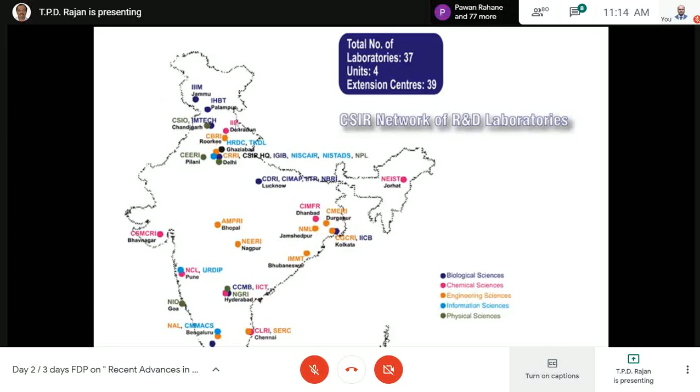Even for energy, we have the Indian Institute of Petroleum at Dehradun. You can visit the CSIR website and get the link, because this may be useful for your students for their research, or you may be able to collaborate with any of the CSIR labs for your research programs as well.

This is CSIR NIIST Trivandrum. Here at NIIST, we work on agro-processing and natural products, biotechnology, chemical science and technology, material science and technology, process engineering, and environmental science.

At Material Science and Technology Division, where I'm working, we work on metallic materials, composite materials, polymers, ceramics, and electronic materials. CSIR is an autonomous society under the Government of India, and the president of CSIR is the Prime Minister, and the vice president is the Minister of Science and Technology. We have a director general, and each lab has a director.

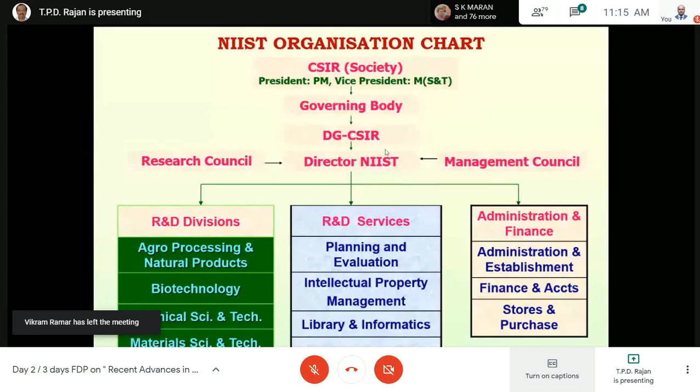With this brief introduction to CSIR, I will move to my talk, starting with just very fundamental basics. Engineering materials are normally classified as metals, ceramics, polymers, and composites. Composites may be metal matrix composites, ceramic matrix composites, or polymer matrix composites, depending on the matrix we are using.

If the dispersoid or the matrix grain size is in the nanoscale, it's called a nanocomposite. If it is the hybridization of two reinforcements, it's called a hybrid composite. And if there is a functionally graded structure, it is called a functionally graded composite material.

Today we will see the lightweight metallic materials and lightweight composites which we are using for different systems. These materials are probably deep rooted in our culture, because whatever we see in and around is made of one or other types of material at the macro scale. Every segment of our everyday lives is influenced by one or other types of materials.

Either conventional materials or advanced materials. In transportation, we develop a lot of technologies, but to visualize and realize them we need different types of materials to convert into useful systems, maybe in transportation, automobile, aerospace, or even aircraft systems.

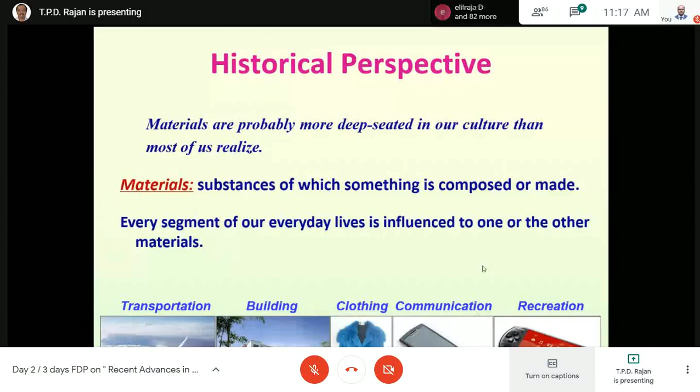The development of the field of materials is very huge, and you can see how even early civilizations are termed in the name of materials: Stone Age, Bronze Age, Iron Age, Steel Age, and we are now in the new advanced material age. Sometimes people call it the silicon age also, because IT is there. So materials form the milestones and physical basis for human civilizations.

So coming specifically to the necessity of lightweighting: we know that if you take different types of materials, for example metal itself, we have steel, which is used for building in reinforcement concrete, or various types of steels which we use in households, for automobiles and so on.

Then we have aluminum and aluminum alloys. Aluminum alloys are used - the main visual thing is in home we use it for utensils and various accessories. In electrical engineering, we use it for conducting material, that is for carrying power. And in the case of automobile, we use it in both engines as well as structural materials. In aircraft, we use it in a large area, so aluminum is used.

And then we use titanium also. Titanium is very widely used in the aerospace sector, and also as an implant in the biomedical sector, apart from steel. Similarly, magnesium is also used for aerospace and other sectors. So we have a range of metallic systems.

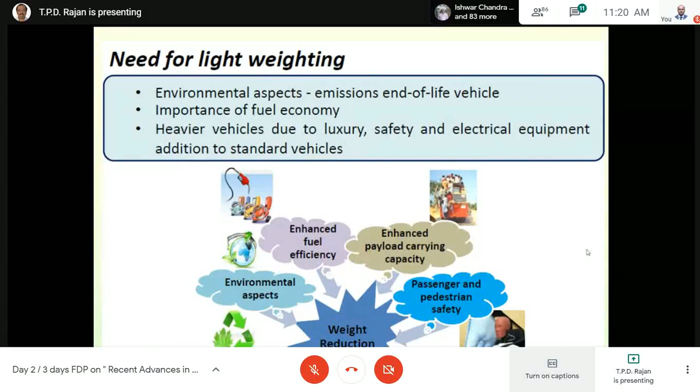So benefits of lightweighting: lesser CO2 emissions because of direct weight saving, due to lightweight materials, and indirect weight saving due to downsizing of components. This leads to lower energy demand and lesser fuel requirement.

Similarly, for the same power to weight ratio, saving weight allows downsizing of the powertrain components. That means weight savings can shorten braking distance for the same braking power.

So you have a lot of weight savings in the case of automobiles, because mainly fuel economy and lower carbon dioxide emission play a major role in the utilization of lightweight materials. Earlier, maybe 20 years back, we had the Ambassador cars, whose fuel efficiency was something around 8 to 10 kilometers. But now we have many vehicles, sedans, which have fuel efficiency more than 20 kilometers. So that means modification in the engine, weight reduction, everything has helped in increasing the fuel efficiency of the automobile.

So the main approaches to energy saving and emission reduction are improvement in automobile technology, improvement in traffic and roads, and good driving habits.

And in the case of new vehicles, energy saving in automobiles comes from hybrid power technology, advanced power systems, and utilization of lightweight materials. We also have structural design optimization, lower friction, and better electronic control systems. Also, alternate energy sources like CNG, LNG, alcohol, and methanol can give better energy savings in conventional systems.

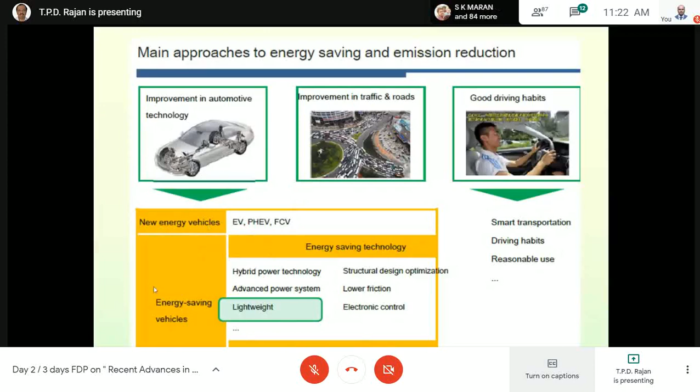So similarly, the new energy vehicles are mostly electric vehicles and hybrid vehicles. Even though they utilize electricity as power, they also require lightweighting. So lightweighting is required both in conventional gasoline-based engines and in electric vehicles.

And if you see the opportunities for lightweighting, as I told, reduced vehicle weight is the most important criteria, and mainly it comes with lightweight materials. So lightweight material means if you use high strength steel, even though the density of steel is higher, the increase in strength can reduce the total thickness of steel. So once we have lesser thickness, then automatically the weight can be reduced.

Or we can replace it with aluminum and magnesium alloys, which have lower density. Aluminum has a density of almost around 2.68 to 2.7, and these aluminum alloys are very widely being replaced in structural parts.

And even in the engine, earlier people were using cast iron and other components, but now all-aluminum engine cars and most components have been replaced by aluminum lightweight engineering. Even in the engines, wherever there's high temperature exposure, they normally give some type of ceramic or high oxidation resistant coatings so that even the light alloys can withstand it.

So apart from the engine, in structural parts, unreinforced and reinforced plastics are being used. And in structural lightweight construction, new structures and complex geometries are being made - laminated and hybrid composite systems, multi-material meaning two materials in a single component, maybe steel and aluminum, or steel and composites, made as laminated structures. And similarly, optimizing the production process, light joining techniques, new manufacturing processes like hydroforming. So all these can be integrated to reduce vehicle weight by utilization of lightweight, metallic, and composite materials.

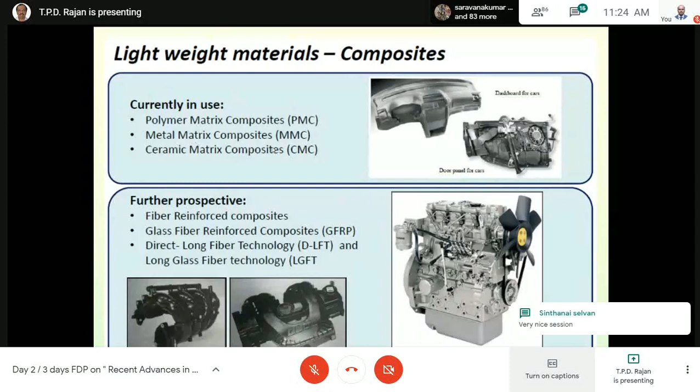So in the case of lightweight materials, specifically composites, polymer matrix composites are very widely used. You see automobile dashboards, door panels, and even glass fiber reinforced plastic air intake manifolds are being used. Engines with sheet molding compounds are used in oil sumps and valve covers and so on. So mostly polymer matrix composites are very widely used in structural or body covers, while metallic and ceramic composites are used to a lesser extent in engine components. But a lot of developments are going on.

And if you see in general, the concept of composite materials is really a boon to engineering materials. By definition, a composite is a heterogeneous mixture of two or more materials with a distinct interface, prepared in an engineering way. The bulk phase of a composite is the matrix, and the other phase is called the reinforcement or filler. Hence the property of the composite is a combination of the properties of both the matrix and the reinforcement, and in most cases it is a synergetic effect.

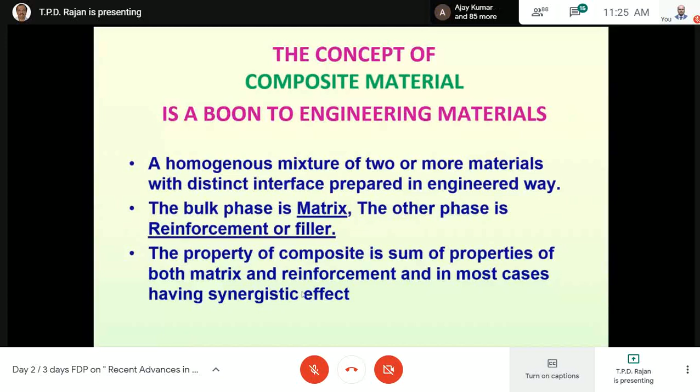In nature, we have wood, which is cellulose fibers dispersed in a lignin matrix. So wood is a well-known natural composite. Similarly, the bone in our body is a natural composite where hydroxyapatite particles are dispersed in a collagen matrix. People have used wood since early civilization, making it one of the most widely used natural composite materials.

Trees can withstand heavy wind blows because, as mentioned earlier, they are cellulose fibers in a lignin matrix, and all these trees have very strong fibers. If you cut the cross section of a tree, you see longitudinally oriented fibers, and these fibers give strength to the tree and any plant so it is not easily broken down even by strong winds.

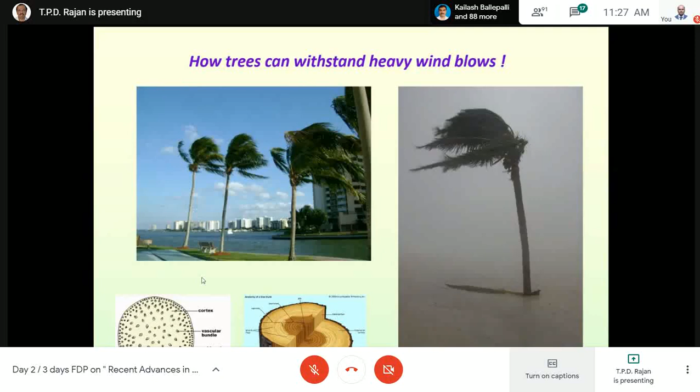In composite materials, polymer, metal, and ceramic matrices are the most widely used systems. Reinforcements used are mostly ceramic fibers, whiskers, and particulates, which possess very high strength, stiffness, and stability. Polymer composites are well developed, while metallic and ceramic composites are being developed for specific uses.

The utilization of hybrid composites, using more than one type of reinforcement, is called second generation composites, and is being developed with a lot of research going on in this direction. Newer systems are mainly focused on functionally graded and smart composite systems.

Coming to the various types of matrices used in composites, plastics like polyesters, epoxies, phenolics, and polyimides are the widely used thermosetting polymers. For thermoplastic polymers, we have nylon, polyethylene, polystyrene, polypropylene, PMMA, and so on. So we have a wide range of polymeric matrices for making composites; however, epoxies, polyesters, and phenolics are the most commonly used matrices for polymer composites.

In metals, we have steel, iron, aluminum, zinc, copper, nickel, silver, titanium, magnesium, and various superalloys. However, aluminum, nickel, titanium, and magnesium are widely used as matrix materials, while as individual metals, steel and iron are used to a larger extent for building and other construction purposes.

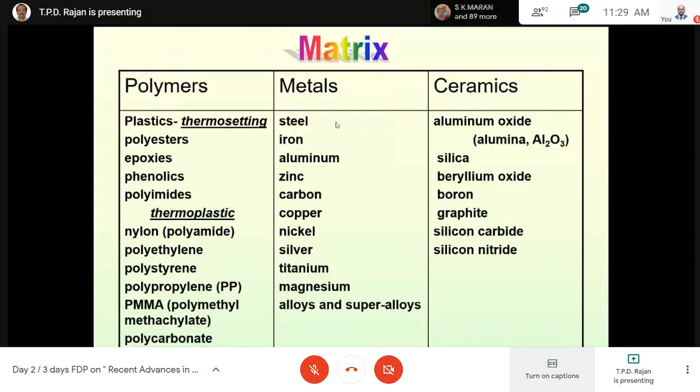In ceramics, we have aluminum oxide, silica, beryllium oxide, boron, graphite, silicon carbide, and silicon nitride—oxides, carbides, and nitrides of various metals which form ceramics. So we can see that there are vast and different types of matrices available to choose for required applications.

So mostly it is a polyester or epoxy reinforced glass fiber reinforced composite, and sometimes they use hybridization of carbon and glass fiber also. The main advantage is that this unidirectionally fiber reinforced composite has very high strength and low density. That's why they use it in wind turbine plants. This is one of the typical examples of utilization of lightweight composite structures in the wind energy sector.

We see the development of various types of composites. The development of composites has been happening for many years. Since 200 BC, reinforced clay-like deposits of the Nile Valley with grass plant fibers have been used in temple walls and tombs in Egypt by the Egyptians. Even the Han dynasty in China used straw-reinforced bricks in the watchtowers of the Western Great Wall of China.

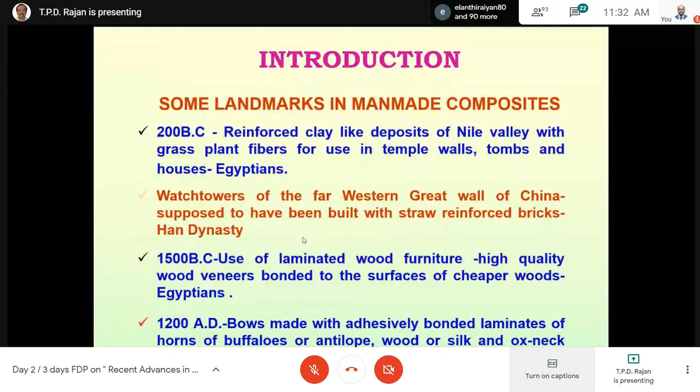Recently, in the early 20th century, people started utilization of phenolic resin asbestos—asbestos being a mineral fiber dispersed in a phenolic matrix resin—used for various applications. In 1942, the first fiberglass boat was made, and fiber reinforced plastics were used in aircraft and electrical components.

In 1946 to 1950, the invention of the filament winding process led to the utilization of filament-wound structures for missile applications. In the late 1950s-60s, the development and introduction of boron fibers and high strength carbon fibers took place.

So for the development of successful composites, we require a very good matrix and very high strength, high performing reinforcement also. The development of these continuous fibers is also very critical.

Once fiber development had come, they started utilizing these fibers in advanced composites in aircraft in the 1960s. In the 1970s, Kevlar fiber was developed and introduction of MMCs took place. In the 1980s, significant increase in utilization of high strength and high modulus fibers was made.

From the 1990s onwards, newer MMCs, CMCs, bio and nano composites were introduced, and the discovery of CNTs led to the utilization of CNT-dispersed composites for both supercapacitors and other applications. Now a lot of nanocomposites are being developed and used for a wide variety of applications.

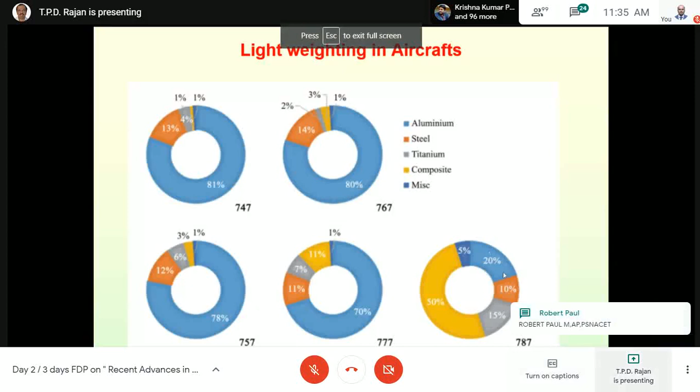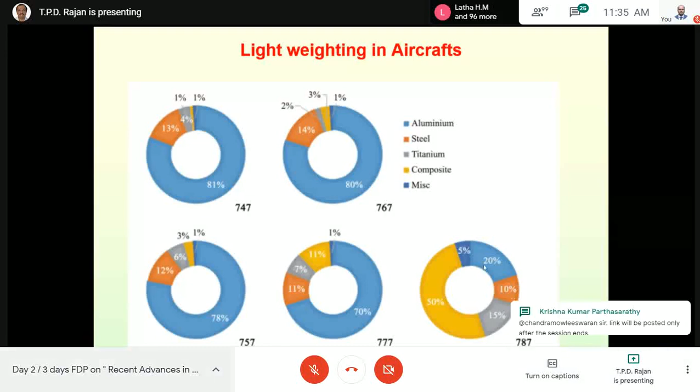Composite here means different types of laminated polymer and all types of composites. But parallelly, the utilization of aluminum alloys dropped from 81% to 80, 78, 70, and down to 20%. So one material is replaced by another. But still, in some high temperature regions and other places, you cannot completely replace with composites, so they still use aluminum, steel, titanium, and various other materials in the aircraft.

They use purely aluminum in those regions. I think when you travel next time by aircraft, you can just closely watch the regions where these composite materials are used.

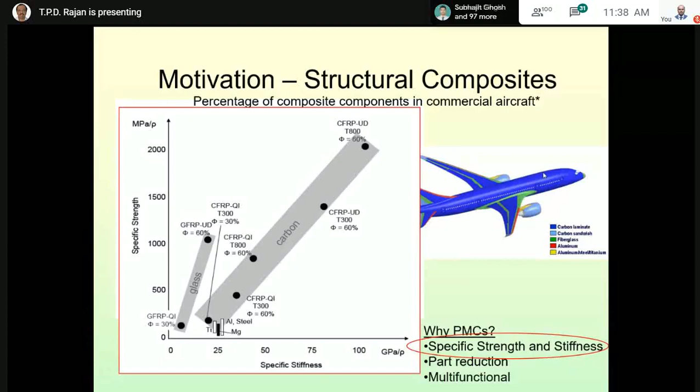So the fiber orientation is very critical in the case of continuous fiber reinforced plastics to attain the properties. Normally when designing parts or components, they orient the fibers towards wherever the maximum load requirement is there. Then accordingly they design and make the composite systems.

Similarly, apart from aircrafts, in launch vehicles and satellites also they use a lot of lightweighting to increase the payload. For example, take the PSLV, a very widely used launch vehicle by India. Here the strap-on motors mostly use outer shell as steel, because maraging steel is very widely used in that area because of the high temperature requirement of the solid motor case.

But wherever the liquid engine is there, either in the second stage or fourth stage, they mostly use 7000 series aluminum alloys - that means 7075, 2219 or 2014 type of lightweight aluminum alloys. Many other parts use high strength, even titanium alloys, where temperature requirements demand it. This has been extended to GSLV, GSLV Mark II and 3 systems also. Even the heat protection system uses high temperature resistant silica tiles in a re-entry vehicle.

So lightweighting is required in automotive sectors, aeronautical aircrafts, or launch vehicles - in all these places, weight reduction is most crucial. So here we can see how composite formation enhances the system.

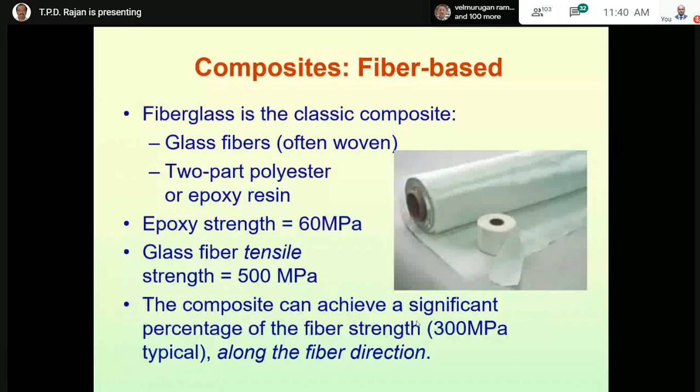For example, if you take a fiberglass reinforced polyester or epoxy composite, the strength of epoxy when used as such is 60 MPa, and the tensile strength of glass fiber is 500 MPa. Once we reinforce this glass fiber into the epoxy matrix, the overall strength of the glass fiber reinforced epoxy composite is almost 300 MPa. That means we can increase strength because as such we cannot use the fiber alone for structural application - so we incorporate this fiber into a matrix for high strength modification.

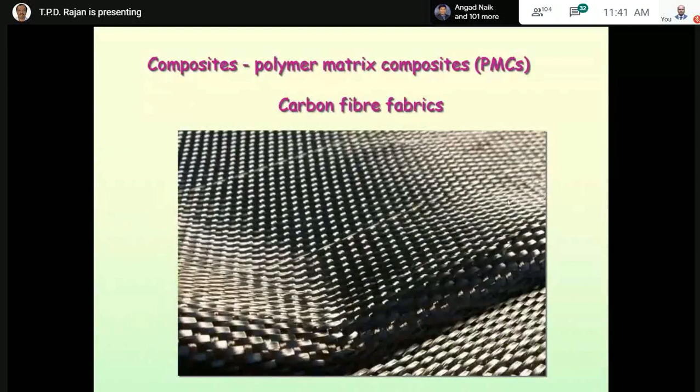Similarly, laminated composites are also used to get high strength in several directions of the fiber, because unidirectional means you get strength in one direction, but in laminated sheets woven in different directions, we can attain strength at different properties. Glass fibers are chosen mainly because of tensile strength, stiffness, and electrical insulation properties. These are the commonly used carbon fiber matrix reinforcements used for making polymer matrix composites.

Similarly, ceramic composites are very widely used in aerospace systems because of the requirement of high temperature resistance, especially in rocket engines or thermal protection systems in re-entry vehicles, nose cone leading edge, scramjet engines for future space vehicles, and so on.

The systems used are carbon-carbon composites with TBC or EBC coatings, thermal barrier coatings, or SiC composites, which is more attractive, or some of the ceramic-based composite, which is developed and used for composite application.

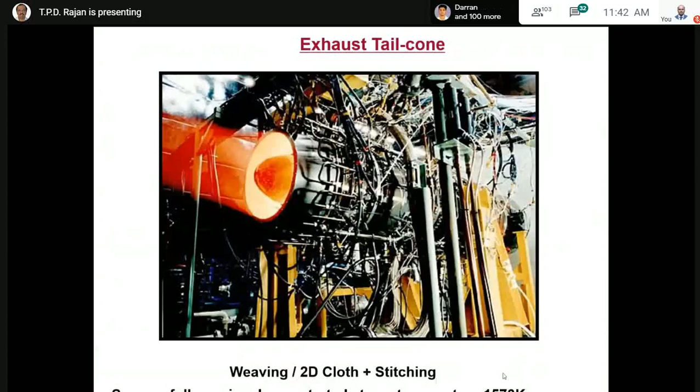The exhaust tail cone in aircraft engines uses 2D woven cloth fiber reinforced composites which can withstand temperatures of 1573 K. SiC thrust chambers are made by 3-axial braiding of silicon carbide fibers, infiltrated with silicon carbide matrix, then hot pressed and fired, used in high temperature test applications.

Ceramic composites are very costly, and mostly used where high temperature resistance is required. But polymer and metallic systems differ: metallic systems are widely used in medium temperature ranges, while polymers are used mostly at room temperature ranges.

The temperature stability of these composites is very critical for their utilization. As we increase the temperature, the strength and stability of the composite come down. For example, polymers can be used up to maybe 200 to 300 depending on the polymer, while aluminum can be used up to around 500 in very few cases, mostly up to 400. Aluminum fiber reinforced composites are used up to maybe 600, though 600 is very difficult, mostly 500 to 550, but the strength of fiber reinforced composites is higher. So pure polymer strength is very low, while aluminum strength is in a higher range.

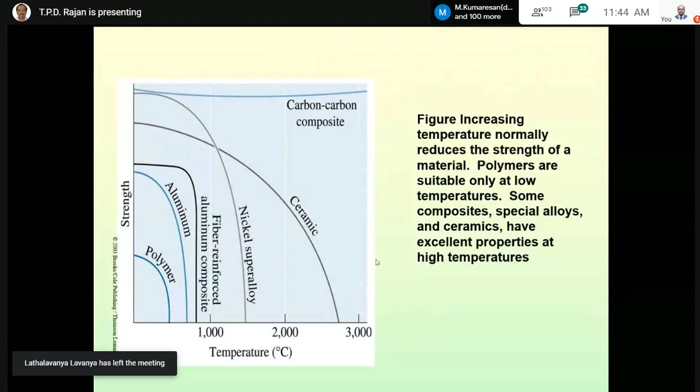Depending on the usage of materials and their temperature requirements, you can choose materials: polymer, aluminum fiber reinforced composites, then nickel superalloys, ceramics, and carbon composites which can withstand up to 2500 degrees and so on. Even ceramic composites are used for cemented carbides, which are used in cutting tools.

When we select materials for different applications, the criteria of selection is very important. Everybody knows about the tragic end of one of the first luxury ships, the Titanic. Steel normally used at room temperature has very high strength, but the same steel, when reduced to very low temperature in the freezing range, becomes ductile to brittle. In the physical metallurgy of steel, this is called the ductile to brittle transition - a ductile material immediately becomes brittle when taken to very low temperature.

If you don't choose the material properly, failures occur. That's why when the steel used for construction of the ship hit against an ice rock, it completely broke because it was in a brittle nature and could not withstand the impact. Similarly, in aircraft also, the material is very critical.

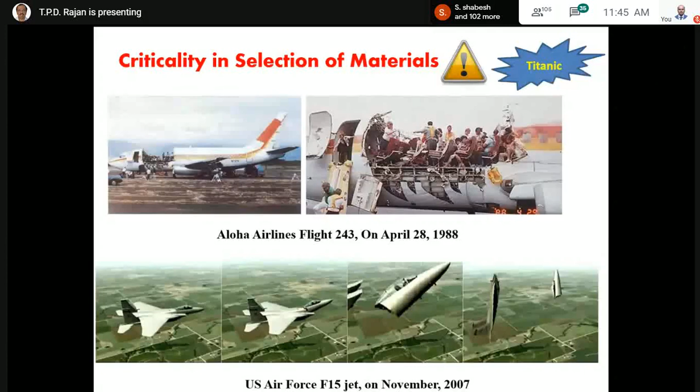Now I will move to metallic composite systems, which is also most widely developed for lightweighting. I had given a lot of general ideas about lightweighting in automobiles, spacecraft, and launch vehicles, and now I will move into the area we are working on, metallic composites, and how these composites are being used for lightweighting systems.

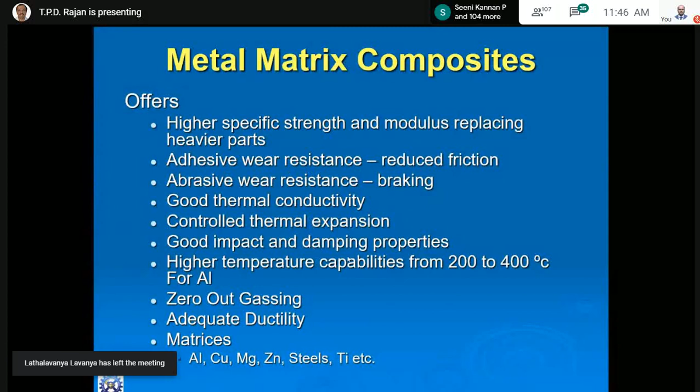I will only highlight the important systems and points. Metal matrix composites possess high specific strength and modulus, replacing heavier parts, and also possess adhesive and abrasive wear resistance because of reduced friction and braking. They possess good thermal conductivity, controlled thermal expansion, and good impact resistance. Most widely used matrix materials are aluminum, copper, magnesium, and zinc.

Initially, people started developing continuous fiber reinforced composites, mostly boron reinforced aluminum, carbon reinforced aluminum, and SiC reinforced aluminum, mostly for defense sectors. SiC fiber reinforced titanium is also developed. Unidirectional, bi-directional, and multi-directional layouts of aerospace structures have been developed and utilized.

However, the problem with these continuous fiber composites is the high cost of the fibers and manufacturing. This composite provides anisotropic properties, meaning the fiber-oriented direction gives very high strength, and the methods used to manufacture this are also limited. So the applications of continuous fiber reinforced composites are very limited to defense and aerospace sectors, because in these sectors, the performance of the material is more important than cost effectiveness. Mostly people look for performance because these are costly systems.

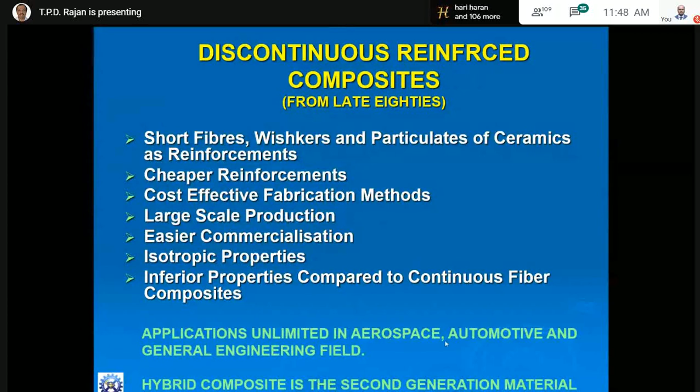Later in the 80s, the development of newer short fibers, whiskers, particulate reinforcement which are cheaper, and development of cost-effective methods at large scale has led to easier commercialization. These materials provide isotropic properties. However, the properties are inferior to continuous fiber composites, but the isotropic properties are enough for making automobiles and other sectors. So discontinuous fiber composites have applications in aerospace, automotive, and general engineering fields.

In the case of metallic composites, sometimes people use only one type of reinforcement, which is called monocomposite. If they use more than one type of reinforcement, for example an SiC particle and a carbon fiber oriented toward the matrix, where you can only see the diameter, these types of composites are called hybrid composites, meaning we have more than one type of reinforcement.

Normally the processing techniques used to make these metallic composites are semi-solid processing, liquid metal casting, spray casting, infiltration, and in-situ processing techniques. In the case of solid state processing, we can use powder metallurgy, diffusion bonding, pultrusion, and mechanical milling techniques.

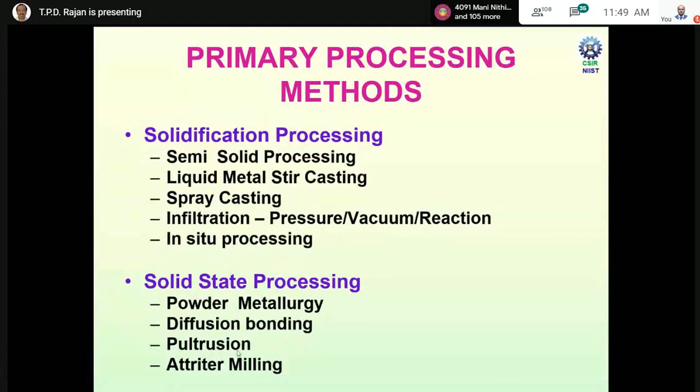In liquid metal processing, we take a melting furnace and melt the alloy inside it, then introduce a mechanical stirrer. Once we stir, a vortex is formed, and we add the particles into the vortex so they get mixed in. This mixture can be made directly into components, or converted to billets which can later be rolled, extruded, or forged, or remelted and converted into components, or directly made into components by special casting such as squeeze or pressure die casting techniques. This is the liquid metal processing technique.

It has easy adaptability and direct component casting is possible. However, the limitations are controlled dispersion of the reinforcement, casting defects, interfacial reactions, and the need for reinforcement surface treatments.

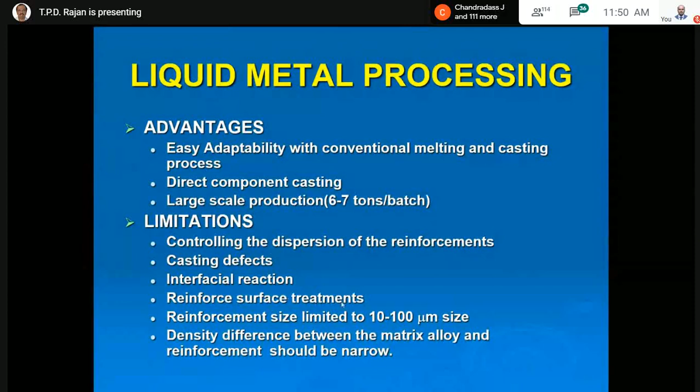This is a typical aluminum SiC composite gear housing made by liquid metal casting and sand casting. After sand casting, it looks like this, and when we machine it, it is converted into very nice gear housings and piston rings. This is used mainly in amphibious battle tanks, because battle tanks also require lightweighting.

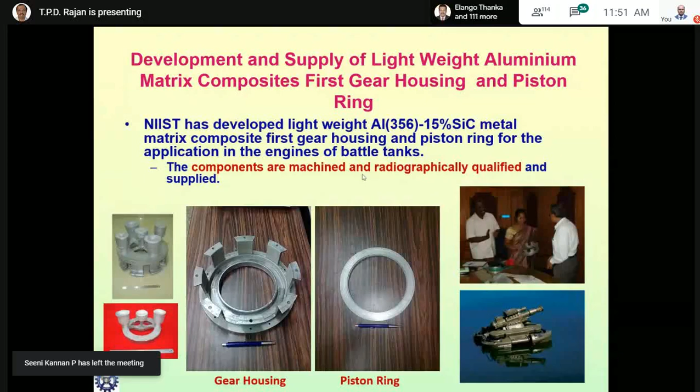You know that when there is a war, there are both heavy tanks and light combat tanks. Light combat tanks have to move faster during an air attack, and move faster across different terrains - maybe water, hills, and all types of terrain. So they use lightweight, high-speed tanks, which require a lot of lightweight materials.

Similarly, lightweight materials are used in bulletproof materials, because shielding also has a problem - if you use steel or other heavy materials, it can withstand the attack, but the overall strength and weight of the vehicle will increase. So they normally use particle reinforced composites that can withstand bullet attacks.

Similarly, composites are used in nuclear applications also. Here it is mainly a functional application, meaning it is coupled with lightweighting as well as neutron absorption. Normally, in a nuclear reactor, fuels are taken from the fuel processing plant to the nuclear reactors, as well as from the reactors back to the yard where they are dumped or stored. These fuels will have some neutron radiation.

When radioactive material is taken through public transport systems, this might affect the traffic as well as the people in and around. So normally it's protected with lead and various types of boron carbide and other materials. Normally they use this boron carbide reinforced aluminum composite as a shield for these containers, because boron carbide is a well-known neutron shielding material.

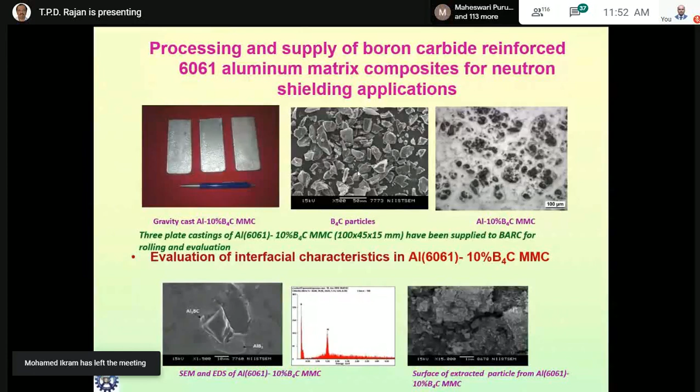The next technique is semi-solid processing. In the case of liquid processing, we completely melt the metal above the liquidus temperature, meaning it's 100% liquid. But in semi-solid processing, one particular phase will be in the solid state, and the other part is completely melted.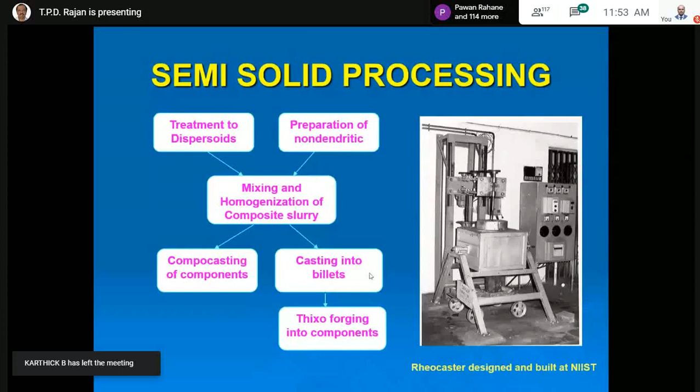This is called semi-solid processing. Here also we can add the particle in the semi-solid condition and disperse it. The advantage is that high integrity near-net shape components with more uniform dispersion and minimum interfacial reaction can be made into composites, and large scale production is also possible. The advantage is dispersion of reinforcement in the nanoscale.

The third technique for processing aluminum composites is the infiltration technique. Here, instead of adding the particle in the melt, we take a porous preform of the fiber or the particulate. Then we pour the metal, placed inside a die in a hydraulic press, and once it's in the liquid state we apply pressure on the ram, and it gets squeezed, and this metal infiltrates into the porous media. So it's called squeeze infiltration.

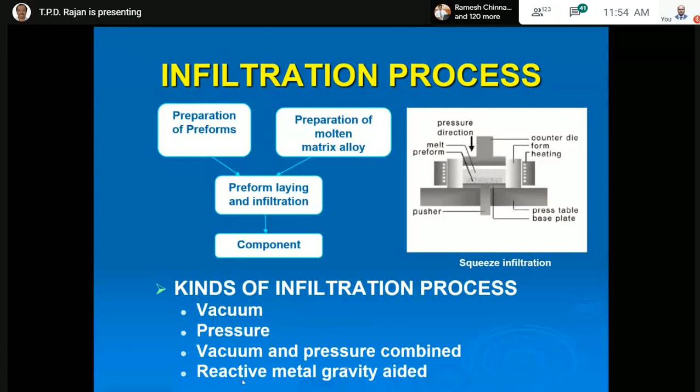Other types of infiltration processes also exist, such as vacuum and pressure coupled, and reactive metal gravity aid. This is a porous structure of an SiC particulate system.

To make this porous system, we mix silicon carbide with some binders and some porogens. Here the inorganic salt is used as a porogen, and then we have to sinter it. Once sintered, we can remove the inorganic porogen salt either by leaching, sublimation techniques, or melting it out. Then you end up with the porosity like this.

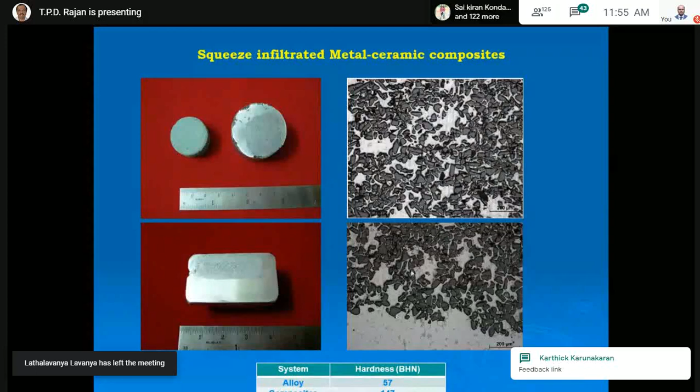This is a hollow body, and we can infiltrate it with the metal. You can see that this is a metal, this is a porous body, and into these pores the metal is getting infiltrated. You can see this is an aluminum matrix SiC composite made with the infiltration technique. The advantage is that the alloy has 57 BHN, while the composite has 147 BHN.

So the metal infiltrated composite brake pads are used because of their friction properties. You can have integrated brake pads in a single system. Normally the brake pad has a front friction layer and a back plate.

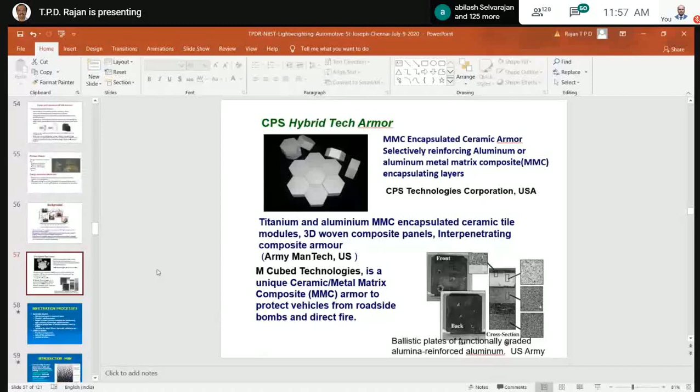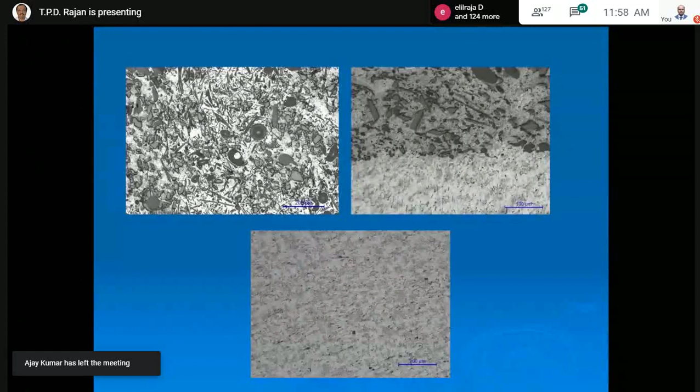So this is an integrated brake pad, meaning you have the brake back plate and the friction layer fixed or integrated into a single system. This friction layer has fibers as well as hard particles, ceramic particles, graphite which controls friction, and other fillers like silica and so on. The back plate gives the support, and the front friction layer takes care of braking when it is done.

In conventional systems, normally what happens is delamination at the interface, a common failure being delamination between the friction layer and the back plate. Another area is functionally graded armor plates, which can be made using this integration, because armors are very much required in protection. Normally they use integrated armors where one side has a metallic system and the other side has a hard reinforcement, which is called an integrated armor, giving more efficiency in protecting against projectiles or bullets by the composites.

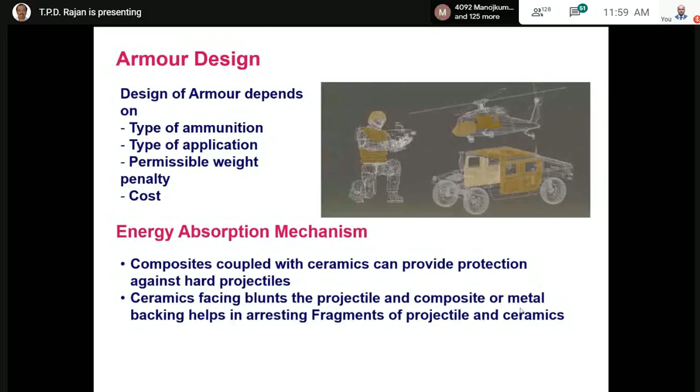These armors are designed for various body armors, vehicle armors, and other types of armors. The energy absorption mechanism is that composites coupled with ceramics provide protection against hard projectiles. That means ceramics facing blunts the projectile, and the composite or metal backing helps in arresting the fragments and projectiles. So this is called an integral armor.

More than that, it's lightweighting. It is used for varieties of systems. So these are some of the MMC armors which are used.

That is ceramic armors, selectively reinforced aluminum armors, which is developed by CPS technologies. Similarly, titanium and aluminum MMC armors with 3D woven composite panels. M Cubed also uses MMC armors to protect vehicles from roadside bombs and direct fire. This is again a functionally graded aluminum composite which is used for armor applications.

So I will give a brief introduction to FGM. I had given an extensive lecture on functionally graded materials last time, because this is one of the advanced materials. So I will conclude the talk with some of the FGMs, which I will go through very fast. Functionally graded materials are smart materials which have a location-specific gradual change in properties, formed or induced through changes in the micro or macro structures.

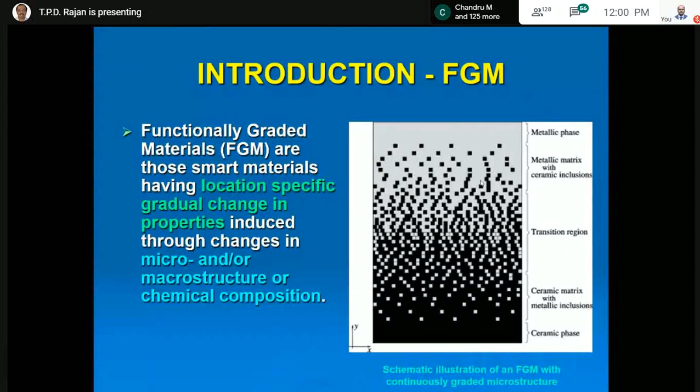Here we can see one side you have 100% ceramics, and the other side you have a metallic phase. These are also mainly used for lightweight structures, because in the conventional approach we develop the component by the list of existing materials, but in the FGM approach we take an inverse design procedure. That means you will be selecting the materials from a choice of various types of materials.

Then we will do the reverse analysis - reverse engineering, inverse design procedure - and then we will be fabricating the component by using the mixture of different materials and different processing techniques.

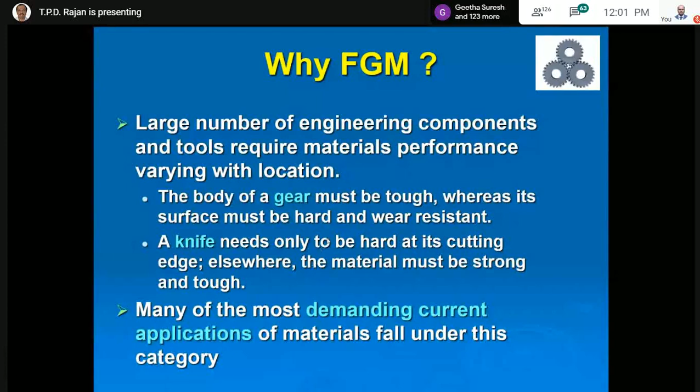So a large number of engineering components and tools require performance that varies with location. Just like the body of a gear must be tough where its surface must be hard and wear resistant. Similarly, take a simple knife - the edge has to be hard, whereas elsewhere it must be strong and tough. Many of the components used in engineering applications fall under this category.

If you see, these functionally graded concepts exist in engineering materials and different types of natural materials, just like bone and even wood. In the case of bone, the outer shell is very hard, which takes the load of your body, and the inside is porous, which acts as a functional region where it generates a lot of body fluids.

Similarly, if you take wood also, this is a bamboo cross section. The outside has high strength fibers which take the load, and the interior is soft tissue which acts as a region for growth as well as for transportation of minerals, water, and other materials from the root to the top of the leaf. So this is a case of functionally graded concepts in nature.

But Japanese scientists in the mid-80s were looking for advanced thermal barrier systems for re-entry space vehicles. So what they thought was - when the spacecraft is entering from the outer orbit to the Earth's atmosphere, it normally comes with a speed of Mach 18.

That means almost 28,000 kilometers per hour. You can visualize how much that is - normally our car speed may be something around 60 to 100, 120 kilometers. But you can see the speed at which it is coming into Earth's orbit, and when it comes inside the atmosphere especially, there is a collision with air molecules which leads to an increase in temperature. Once the temperature increases, it may go up to 1300 to 1600 degrees C.

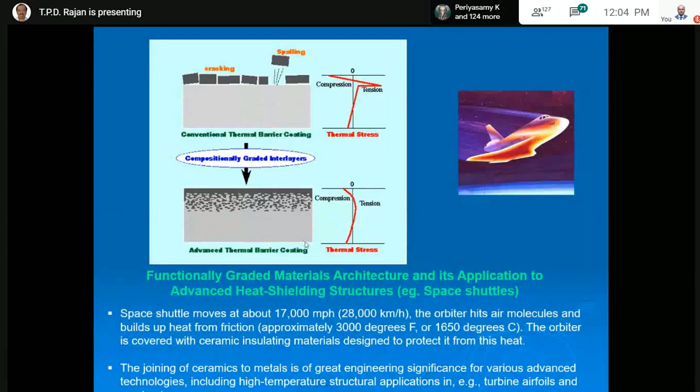In a conventional thermal barrier system or thermal barrier coating, there is thermal stress at the surface, with a cladding between a substrate and the ceramic tile. Because of this thermal stress, cracking and spallation takes place. But with an integrated advanced thermal barrier coating using a compositionally graded structure, the thermal stress is smoothed so that it cannot delaminate. That's why people have started using functionally graded structures for advanced heat shielding materials.

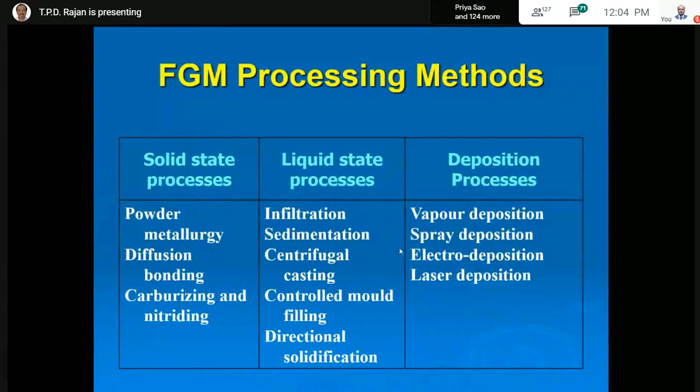The same processes used for MMCs apply here - powder metallurgy, diffusion, carburizing, infiltration. All these processes can be used for the composite infiltration technique I had already discussed.

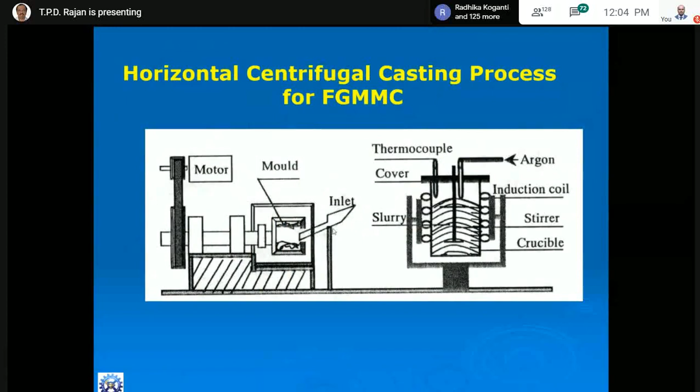Another technique is centrifugal casting, where a mixture of composite is poured into a rotating mold, leading to the formation of two different layers - particle enriched and particle depleted layers. This is a furnace and centrifugal casting machine with a rotating spinning mold. Once the spinning mold is on the horizontal axis, it's called horizontal centrifugal casting, and if the axis of rotation is vertical, it's called a vertical centrifugal casting machine.

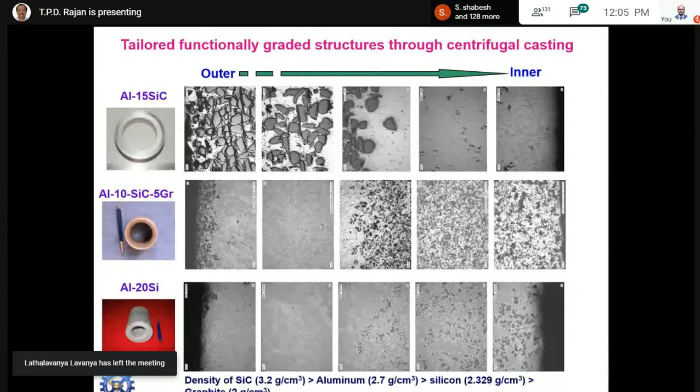Once you centrifugally cast it, because of the variation in density, if the reinforcement density is lower, it goes towards the interior periphery, and if the density is higher, it goes to the outer periphery. So in aluminum graphite composite, graphite has lower density, so it goes to the interior periphery, and silicon carbide, which has higher density, goes to the outer periphery. This gives you a functionally graded composite. In the aluminum SiC system, the SiC particles segregate towards the outer periphery because of the higher density of SiC, 3.2 grams per cc, compared to aluminum's 2.7. However, graphite at 2 grams per cc and silicon (not silicon carbide) at 2.3 gets segregated towards the interior periphery.

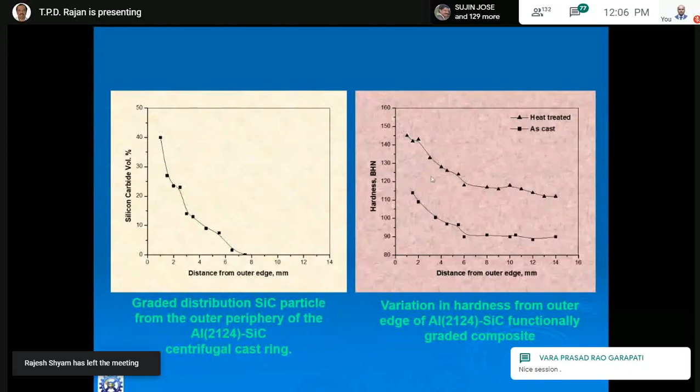These are some observations I made, showing the structure where particles are present towards the outer region. This increases the volume fraction of particles towards the outer region to around 40%, and this increases hardness - the outer periphery has a hardness close to 145, whereas the interior is around 115 BHN, in the case of an aluminum 2124 SiC system.

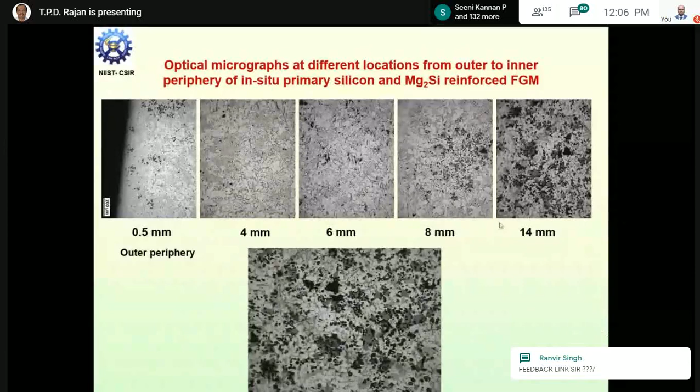This is also a centrifugally cast primary silicon and Mg2Si system - a typical brake rotor disc, centrifugally cast, which has particle concentration in the braking region. The volume fraction is very high in the braking region, and this enhances hardness, tensile strength, modulus of elasticity, and compressive strength - meaning the properties in the braking region are very high.

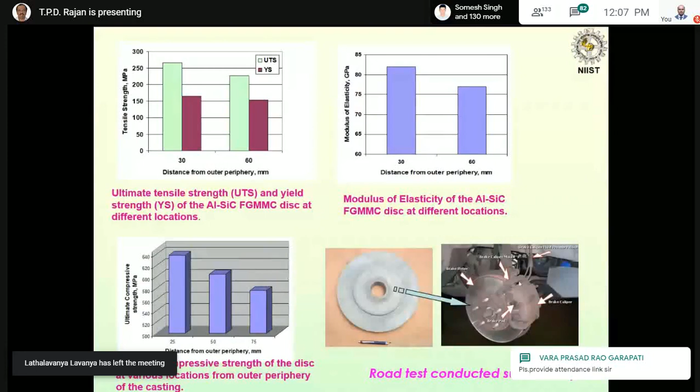Once you apply the brake and the brake pad comes in contact with the rotating disc, this exerts a high compressive force and friction force on it. The presence of silicon carbide increases the stiffness as well as wear resistance. So braking performance is there, but the main requirement is light weighting - you can use an aluminum composite. The disc used is 1/3 the weight of a cast iron disc.

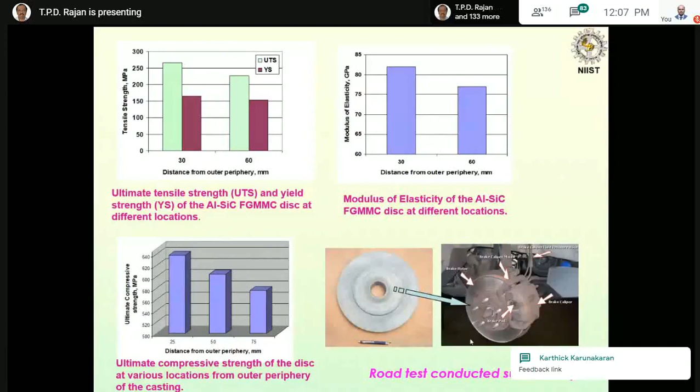Similarly, commercial alloys can also be used to make functionally graded composites, like 390 alloys. This is a centrifugally cast alloy which shows higher primary silicon towards the interior region. This can be used to make cylinder liners in automotive parts, apart from the brake rotor disc.

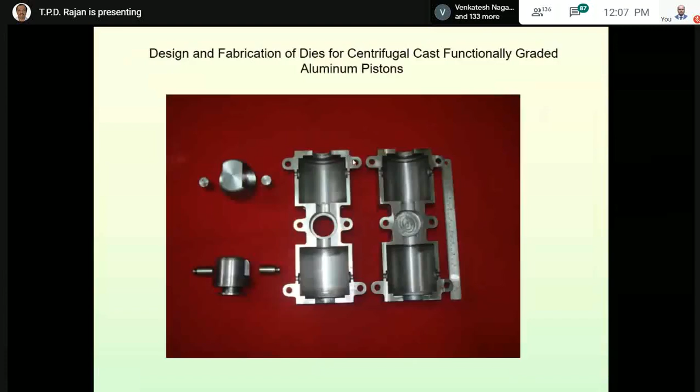Similarly, pistons can also be made by functionally graded aluminum systems using a mold, and in pistons made by the centrifugal casting technique, you can see that certain areas have very high hardness. Apart from centrifugal casting, we can use sequential casting also.

That means we have two layers, one above the other. We can pour it and make this sequential - one area can have a very hard alloy, and another area can have a soft alloy.

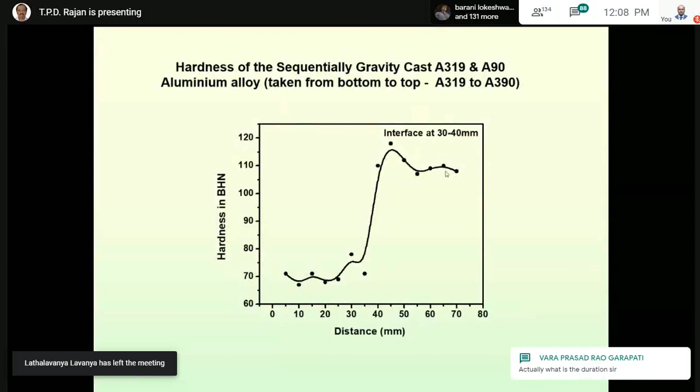You can see the hardness of soft alloy is around 70 BHN, and the hardness of 390 hard alloy is 110. That is in the case of as-cast condition.

Similarly, the gradient slurry disintegration technique is also used to make the composite. Here, what they do is disperse the composite and allow it to settle. Then the bottom pour furnace is used, and the initial casting will be rich in particles, while the second one will have a very low particle region.

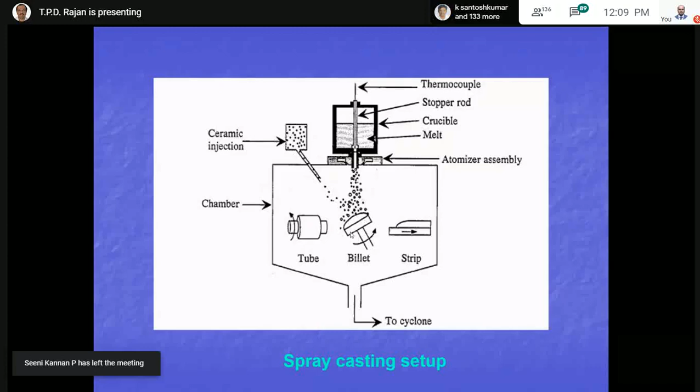Similarly, the spray deposition technique can also be used to make the composite. In spray deposition, we have a crucible into which we have the melt, then an atomizer. The melt is atomized, and there is a ceramic injection. The ceramic particles are injected along with the atomized melt and get deposited on the substrate, leading to the formation of a functionally graded composite structure.

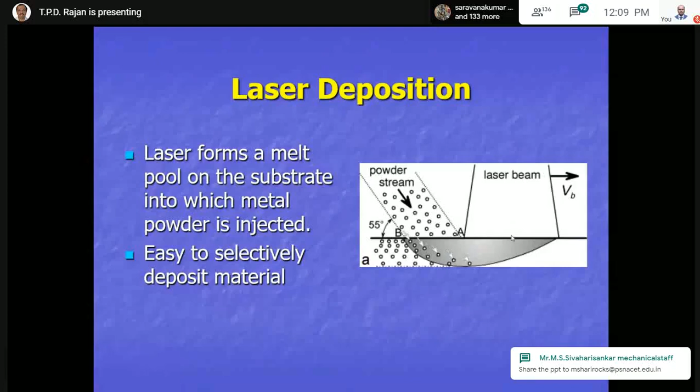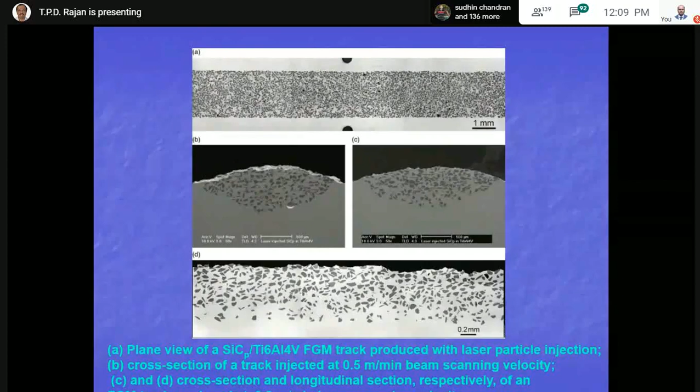Another technique is laser deposition. Here you have a substrate over which a laser beam moves, melting the surface, and powder is injected which penetrates inside and gets dispersed by the laser deposition. This leads to the formation of particles. This is a top surface, and this is a cut cross section - we can see this is a graded formation of silicon carbide particles in a titanium 6 aluminum 4 vanadium composite system.

Similarly, laser cladding can also be used. That means you coat substrate A with B, then pass the laser, and it gets melted and mixed. The B layer can again be melted, so a layer richer in B will increase, and finally you end up with a layer complete with B. So this is also possible.

So these are some of the lightweight materials, lightweight metallic composites, and lightweight functional materials. I will end with the engineering applications of metallic composites in both automotive and aerospace systems. MMC is very widely used in ground transport, electronics and thermal management, as well as in aerospace sectors.

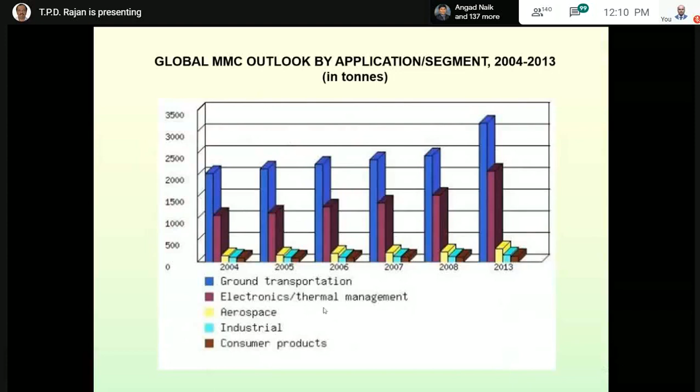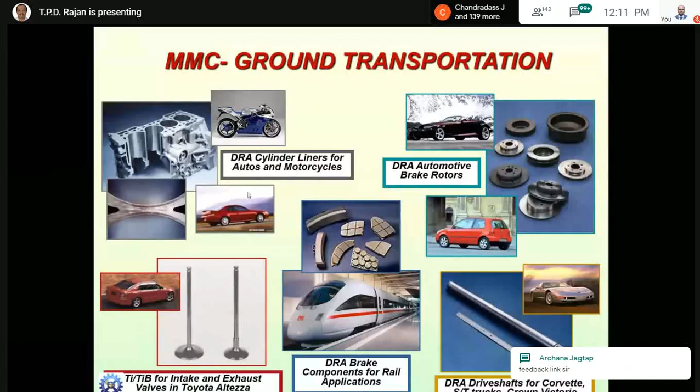In the case of ground transportation, cylinder liners are used in automobiles. Automotive brake rotor discs are being developed, and brake pads are also developed and used in high-speed trains. Then titanium boride intake and exhaust valves are used in Toyota vehicles. Similarly, drive shafts have been developed with aluminum composites, mostly with aluminum or titanium composites, with lightweighting as a major criteria.

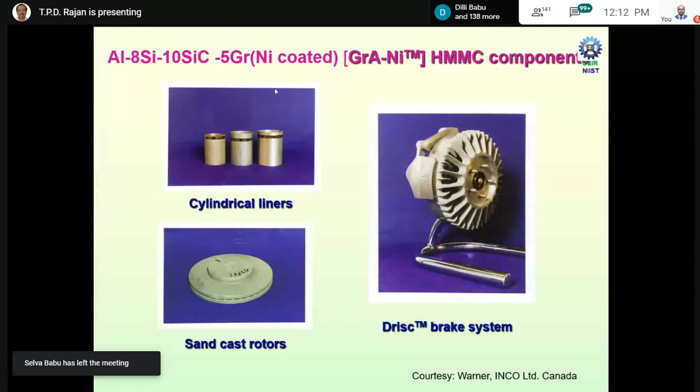Similarly, MMC automotive components: cylinder liners and pistons are developed by KIST and Hyundai and used. Connecting rods are also developed. Aluminum graphite composite engine blocks are developed for different applications. The International Nickel Company in Canada developed different types of aluminum cylinder liners and rotor discs by sand casting techniques - this is an aluminum 8 silicon 10 SiC 5 graphite hybrid composite component.

In the case of rotor discs, aluminum SiC rotor discs are developed and used in German high-speed trains. Saab Wabco, a German company, developed this rotor disc, used in high-speed trains to reduce bogie weight. There are almost 8 discs in a single bogie. We can see how it can be utilized to control speed, reduce speed, or stop the train using the lightweight rotor disc.

Similarly, composites are used in recreational parts, just like bicycle frames, horseshoes, baseball, skating shoes, and boat shafts, and so on. Apart from space and automotive, aluminum MMCs are also used in conductor applications.

Here also the requirement is lightweight. The transmission lines which bring power to your home, or from the power stations to the transformers, use aluminum conductors, which have a steel core at the center and aluminum around it.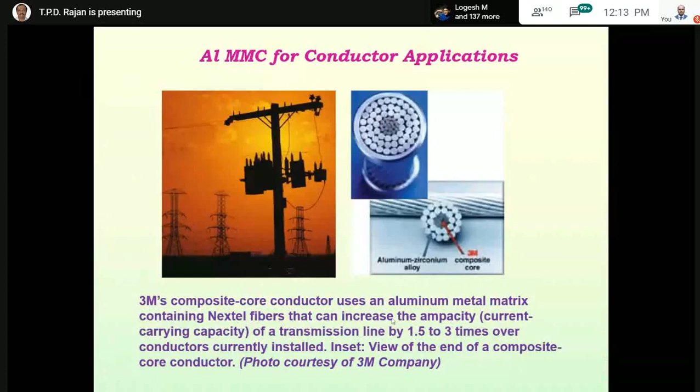This has a higher weight than the aluminum composite cores, which means you can increase the transmission between the lines, reduce the weight, and have more wires and transmission lines. So you get a reduction in weight between transmission lines by utilizing aluminum Nextel fiber composites. The 3M company made these Nextel fiber reinforced composites.

Ashish, hey, excuse me, there was some disturbance.

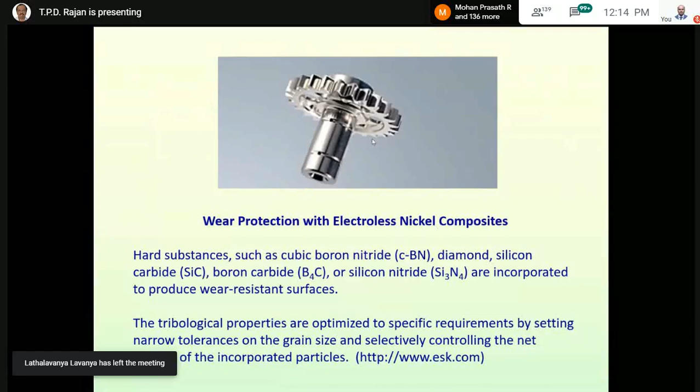Similarly, wear protection with electroless nickel composites are also made, because these electroless nickel composites provide better surface wear resistance by dispersion of boron carbide, silicon carbide, silicon nitride, and so on.

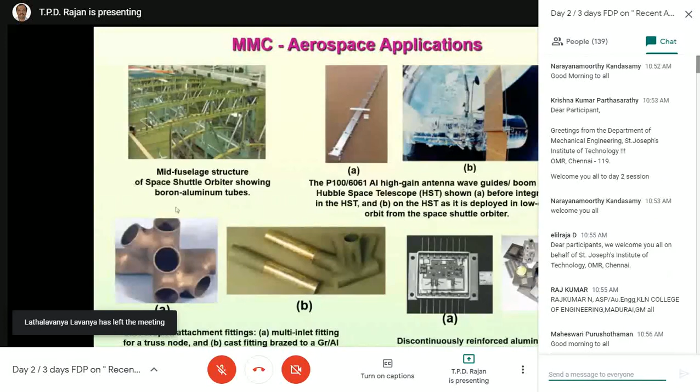Similarly, MMCs are used in aerospace applications mainly for lightweighting. In the Space Shuttle Orbiter, boron aluminum tubes and P100 6061 aluminum high gain antenna waveguides are used.

It is also used in Hubble Space Telescopes: cast SiCp aluminum attachments, multi-inlet fittings for truss nodes, cast fitting brazed graphite aluminum tubes, and discontinuous reinforced aluminum composite MMCs are used in electronic packaging systems.

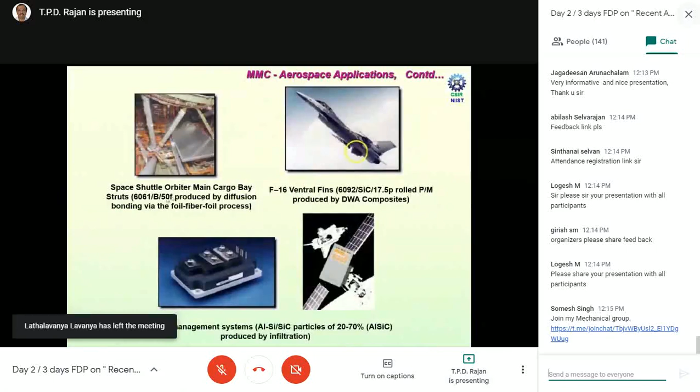Similarly, in space shuttle orbiters, 6061 boron 50 volume fraction fiber reinforced composites are used by diffusion bonding techniques. And in fighter aircrafts, the ventral fins are made of 6092 SiC composites. All this is mainly to reduce weight and increase performance.

Similarly, aluminum SiC composites are used for thermal management materials in space shuttles and satellite systems, and 6092 SiC composites are used in aero engines as fan exit guide vanes.

The main criteria here is to improve resistance to erosion and foreign object damage over graphite epoxy and other types of composites, because at the engine's exit and entry guide vanes the temperatures experienced are much lower compared to the central core, so they can use lightweight aluminum-based composite material.

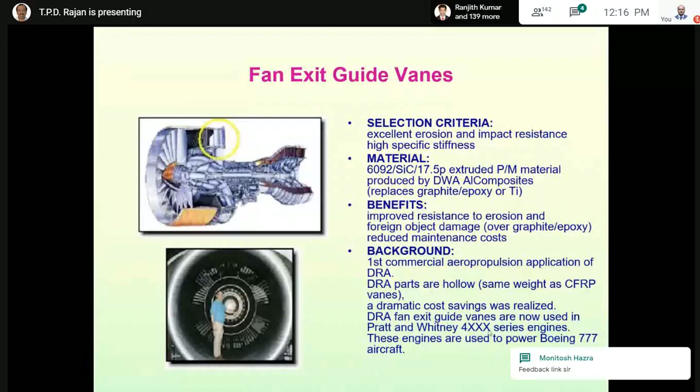This is used by Pratt & Whitney in 4XXX series engines and Boeing in 777 aircrafts. Similarly, MMC gas turbine components are used in aero engines, mostly in fighter aircrafts by the USA.

And the Airbus A380 uses almost 20% glare composites, which are glass fiber reinforced composites featured in front fairing, upper fuselage structures, crown structures, and side panels.

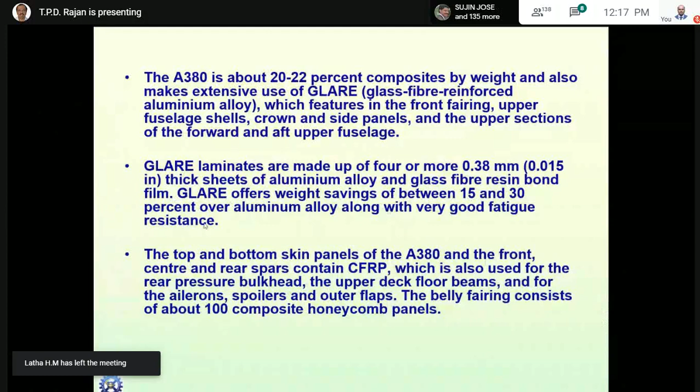In the upper sections, the glare laminated composites are made up of 4 or more 0.38 mm thick sheets of aluminum alloy and glass fiber reinforced resins. This glare composite offers weight savings between 15 to 30% over aluminum alloy, along with very good fatigue resistance. This is the A380 aircraft which uses these glare composites.

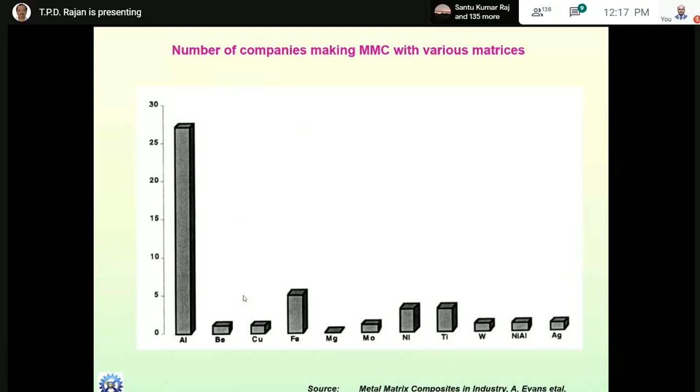Similarly, potential applications are found in F-15, F-17, F-16, and many other aircrafts and air propulsion systems where aluminum composites are used. Among the different systems, aluminum composites are the most widely used MMCs compared to titanium, and as reinforcement, SiC and alumina are very widely used.

To summarize, MMCs, FGMs, and nanocomposites show great potential for various engineering applications in automotives, aerospace, defense, and general engineering because of their lightweight nature and high performance.

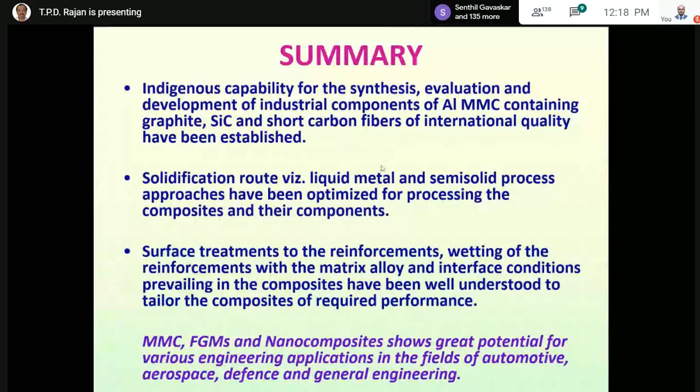The future directions of MMCs are functionally graded composites, nanocomposites, in-situ composites, presence of new types of dispersoids, tailoring of matrices, and eco-friendliness, which are the major criteria for development of new functionally graded and lightweight composites.

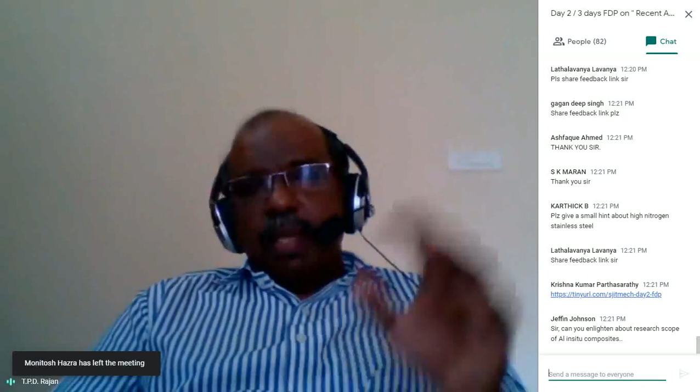At CSIR we mostly work on aluminum matrix composites for both automotive and aerospace applications with different user agencies. Mainly, as I had shown, some brake rotor discs, brake pads, cylinder liners, and other systems for defense and nuclear applications, which we develop and supply to these automotive and aerospace users. Some of the examples I showed are mostly from my own work - rotor discs, cylinder liners, pistons in automotive, and other thermal management systems and composites like those used in tanks, made at CSIR. We mostly work on aluminum and magnesium based composites and their components for both automotive and aerospace.

So any other questions? Sorry, there was some disturbance in between. Okay, no issues, sir, as well as from the audience. No, okay, no problem, sir. I think there are no questions from the chat box. One more question is there, sir, I think.

Mr. Karthick has asked for a small hint about high nitrogen stainless steel.

I am not working in steel, so I cannot comment much about high nitrogen steel. Sorry for that, actually. Okay, it's okay, sir. Thank you.

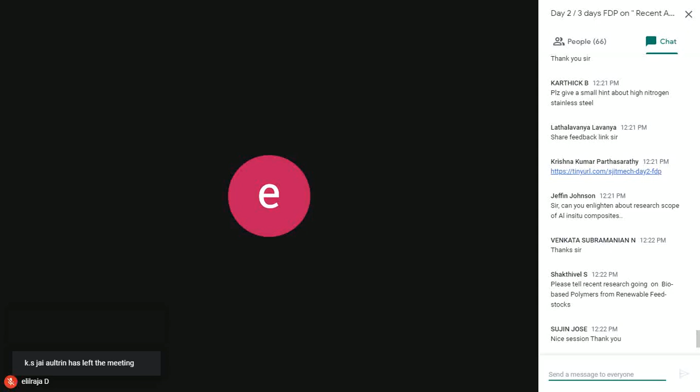Hello, sir. Oh, Dr. Crispin, I think if there are no more questions - sir, how about the degradation and reusability of polymer composites

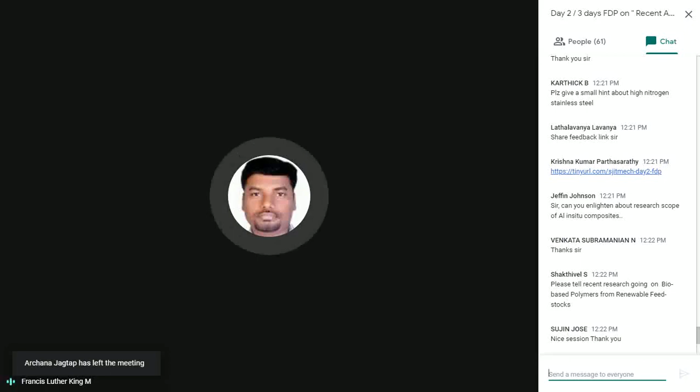when going for lightweight applications? So degradation will be there because one of the disadvantages is that after some time in service, the epoxy or polyester matrix gets degraded, but the fiber retains its strength. So there is degradation, and it has a limited lifetime. Still, the aircraft continues in service, so it's not a major issue, but periodically they monitor the health and change the composite structures. As such, there are no issues. But the other issue is biodegradation - that means reusability is difficult. If you use aluminum or steel, you can melt it and use it again, but with polymer fiber reinforced plastics, it is very difficult to reuse. You can remove the resin, and sometimes people extract the fibers and use them for secondary purposes - that can be done. But the thermosetting matrix, we cannot do anything about. Otherwise, there's no issue. Polymer composites are very widely used because of low cost and light weight in various sectors, mainly in exterior, low temperature structural applications.

Sir, I would like to ask a question regarding aluminum in-situ composites. Which reinforcements can be added for further research? That means aluminum in-situ composite - which reinforcements can be added later for further research?

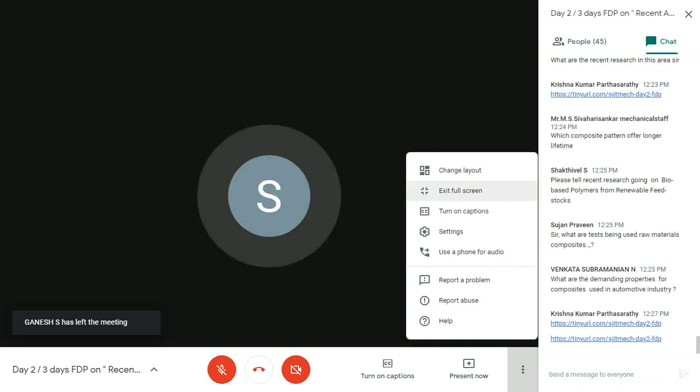Okay, can you suggest any source where we can find related research going on from the feedstock?

Any source? No, but a lot of review papers are there. I think if you mail me, I can send some papers on natural fiber reinforced composites by friends of mine who have published it, where you can get a lot of information. My email ID is tpdrajan@gmail.com. You can mail, sir, and I can share it. Is it there in the first slide? TPD Rajan, tpdrajan@gmail.com.